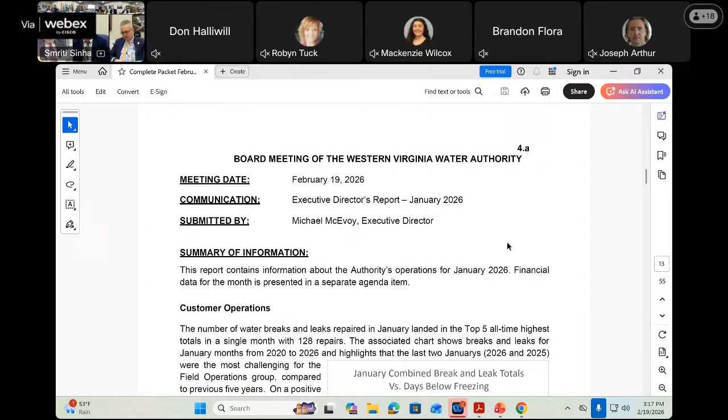Going through the report, Mr. Chairman, I want to highlight the wonderful work of our field operations and water quality crews. We had a lot of water main breaks at the end of January, the last two weeks, and those continued through February. We're reporting 128 breaks in January, most toward the end of the month, and we've already had 115 in February. That stretch of cold weather was problematic for the distribution system, but our crews did a wonderful job. We had pretty much everybody fixing water main breaks. We did have some sewer issues, but most of our CIP crews were fixing water main breaks.

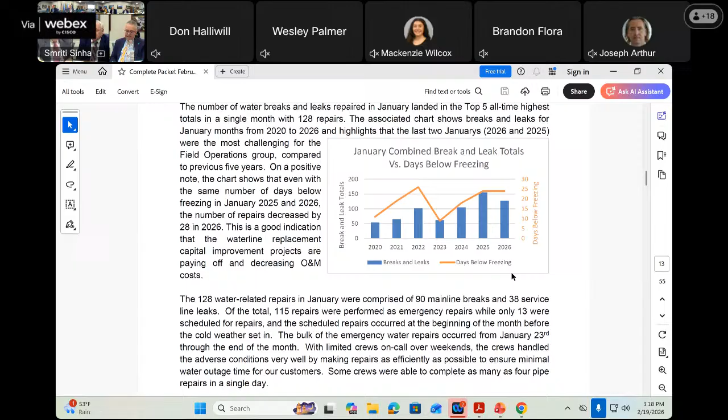I want to give a shout out to EC Pace. We actually had a main break on a bridge. They have a crew that's used to working on bridges and have the right equipment. They were able to get in and fix that overnight for us. We're actually looking at lining that main in the next few months to make sure that doesn't happen again. They were at the right time, right on the spot for us, really helpful there.

Our folks put in a lot of time through January and the first few weeks of February, and it wasn't just our field crews doing repairs. Our water quality folks were balancing tank levels across the organization. We had to run Spring Hollow more than we typically would, and some people had to stay late. It was a real team effort to deal with this.

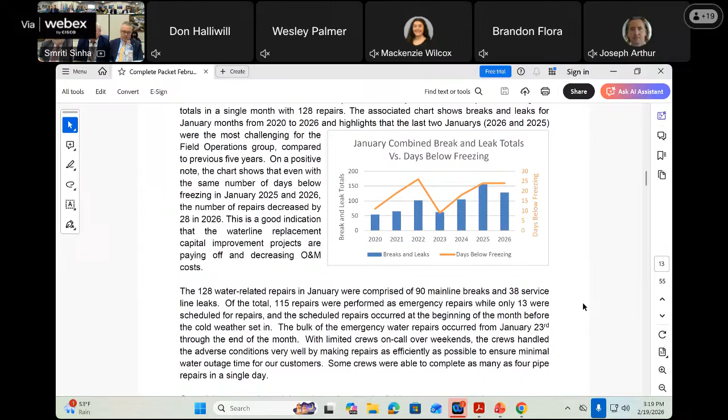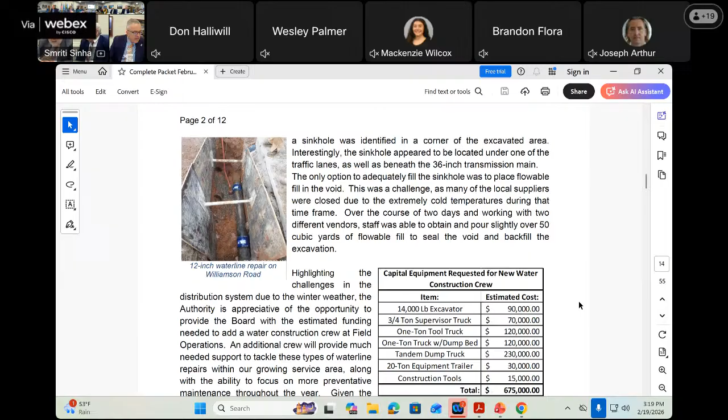On page 2, we talked last month about adding a new water crew, and we provided the cost associated with doing that. It's expensive to add a new crew, about $675,000 to outfit them, and the O&M expense for a new crew is about $300,000. But we do need to add another crew. This is part of a multi-year step we've been doing for field operations. We added a new sewer crew last year, and again we'd like to add a new water crew this year.

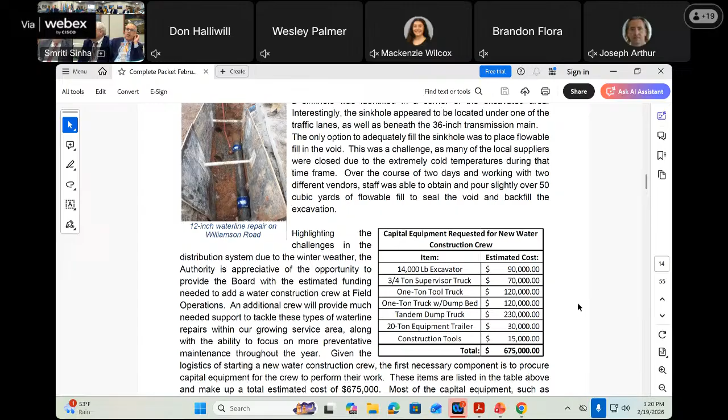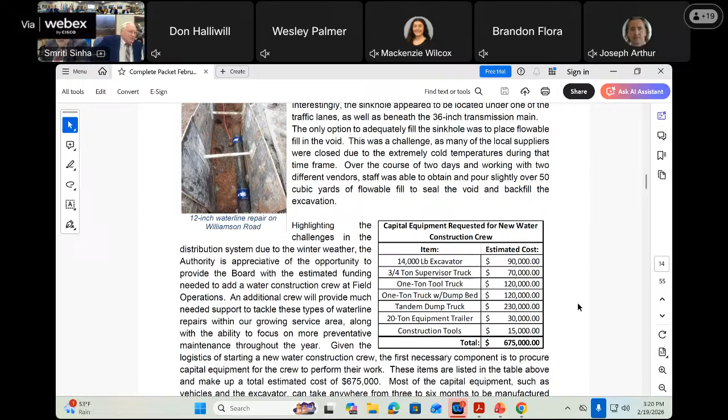Don had suggested that if we need it, we should go ahead and start now. We can start lining up equipment and recruiting new members, but this would be included in next year's budget since the time frame to stand it up means it would be part of next year's budget anyway. This will be an annualized cost, though the equipment is a one-time purchase that can last from 5 to 20 years. Dump trucks get a long time, a lot of use out of those, and excavators too.

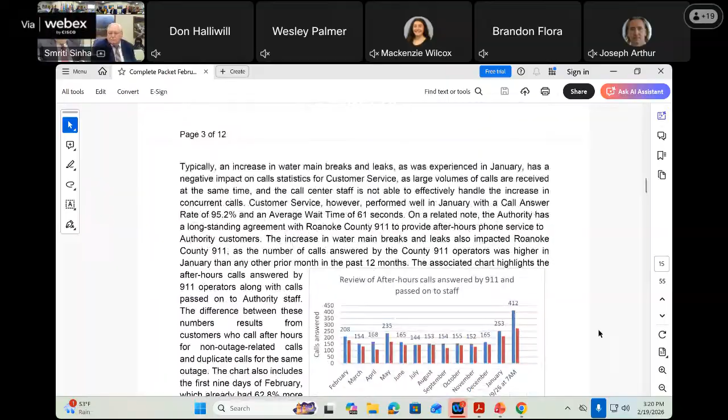On page 3, I want to point out our debt set-off program. The state of Virginia has a program where local governments can submit unpaid fees, including parking tickets, other liens, and for our case, unpaid water bills. You submit that debt to the state, and this year we turned in a little less than $500,000 of unpaid debt. The state will try to match that against tax returns for citizens, deduct it from their returns, and send us the money. It's a good source of recovering bad debt, and it works well for us.

Leon, I don't know if you want to add anything. We have seen an increase in collections through the debt set-off program, probably since October, so we're hopeful we'll collect quite a bit of money in this year's tax cycle. We only intercept the state return, not the federal. Lottery winnings also fall into that, so somebody will have a bit of their winnings taken to pay utility bills.

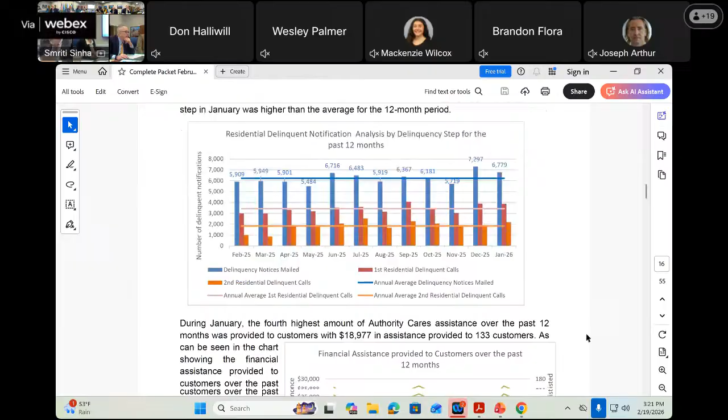On page 5, you guys probably noticed it started raining the last couple of days, so that's good. We got a nice rain event last weekend, a little less than an inch, but that was on top of our melting snows, so we've started seeing the reservoir fill.

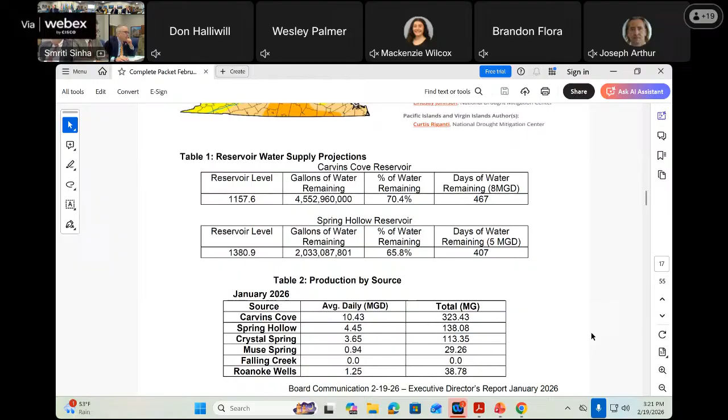As of today, we're 11.3 feet down, compared to last Wednesday. I think we were like 12.6 feet. So we've added a foot and a third or so to the reservoir.

We're getting rain today. Scott tells me we're getting good flows in the creeks and the Roanoke River. So we're going to continue to add water from this event, and it's supposed to rain again through tomorrow and then possibly Sunday again. So we're getting to that time of year where the reservoir starts to fill, both reservoirs start to fill, due to the spring rain.

Obviously we've had a lot of people looking at this number this year, especially in context of the data center project. And I've tried to let people know that it takes most of the spring to fill it up. It's not a sprint. One rain event does not top off the lake. But we're moving in the right direction there, so very happy about that.

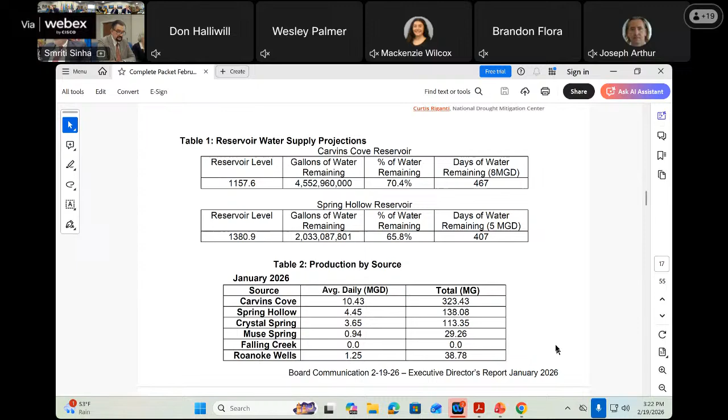Let's see, on page 6, we had an equipment failure at Spring Hollow.

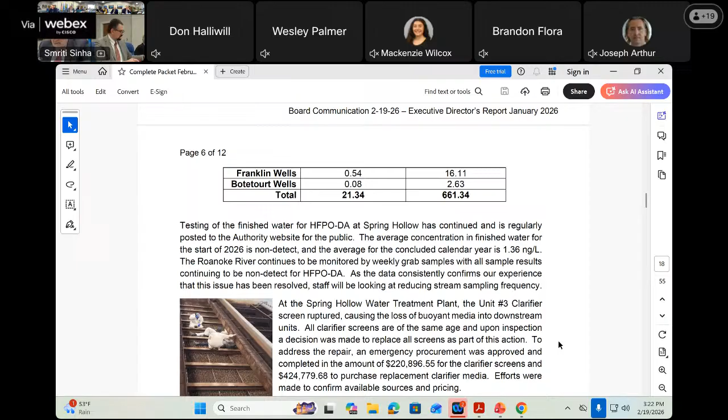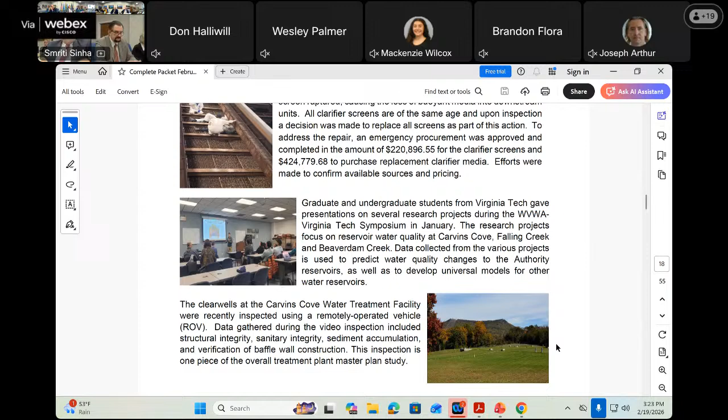The main filtration units there, we have 3 of them. They're upflow clarifiers, and there are screens and grids that hold the media in place. For most filters, you're flowing water down through them. These are ones where you flow water up through them. So there's a grid system in place that keeps the media in place. We had one of those fail.

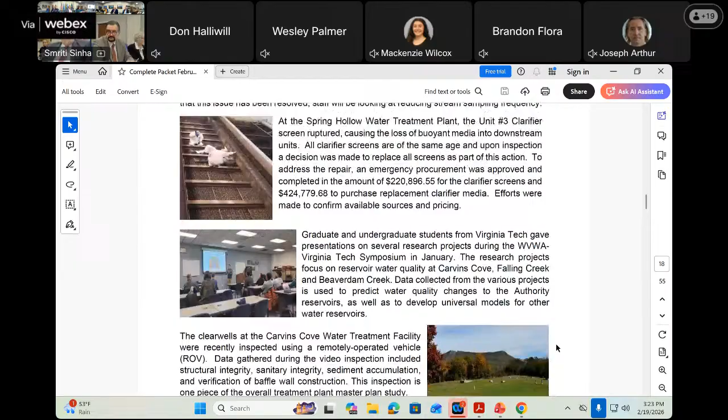We're kind of working with Virginia Tech to figure out maybe what happened here. Those were actually replaced in 2015, but when you look at the backside of them, they've had excessive corrosion. So the previous ones had lasted a little bit more than 20 years. We got a little bit more than 10 years out of these. So we started seeing the same corrosion issues on the second unit.

So we went ahead and just ordered new replacements for all 3 of the screens, and those are being shipped. In addition, since we were going to have number 3 down, we decided to just go ahead and change the media out on that, since that hadn't been done in a number of years. So it's kind of an expensive emergency repair here, but it gives us an opportunity, while it's down, to get in there and do some maintenance and change out the media.

Scott, I don't know if you want to add anything. No, Mike pointed out it's an unusual failure, so we're going to work with Virginia Tech, just taking a look. It's aluminum, and the level of corrosion does not seem normal, so...

Aluminum instead of stainless. And in 2015, for the pricing from the vendor, you could buy almost 4 sets of aluminum screens for 1 set of stainless steel. We do somewhat wonder, since 2015 is when we saw some problems in the American metals market. During that period of time, we saw a number of items across metals that we ordered where they were substandard. So that's part of the question - was this a one-off because of the quality of metal from the period of time they were procured, or do we have a corrosion issue? So we'll work through that.

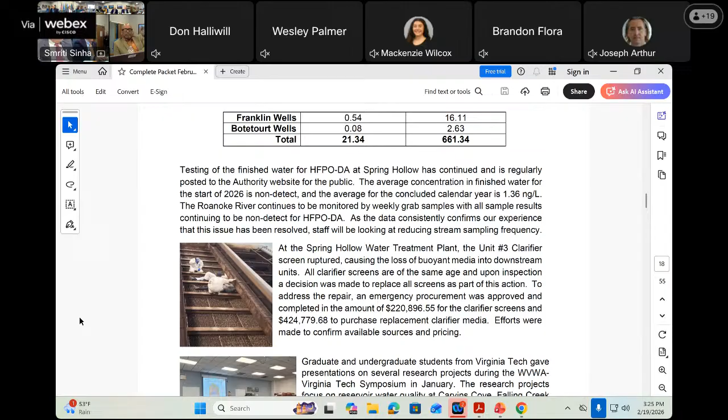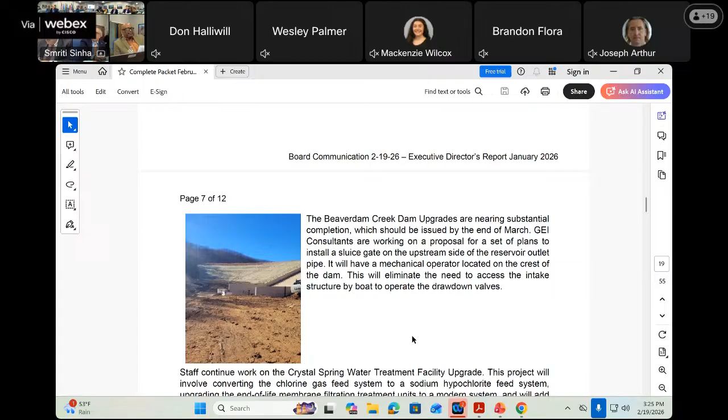At the top of page 7, I want to point out that the Beaverdam Creek Dam upgrades are finishing up. Our staff member monitoring the construction up there says it's a real mud pit right now. But when it dries out and we're finished, it might be a good field trip if you guys want to go up there and look at it. It's a pretty impressive structure that we've had to construct to meet the state's dam safety standards.

Something in the May or June timeframe, when we get all the road cleaned up and everything dries out, we could schedule something to go and take a look at it. But it's a pretty impressive structure.

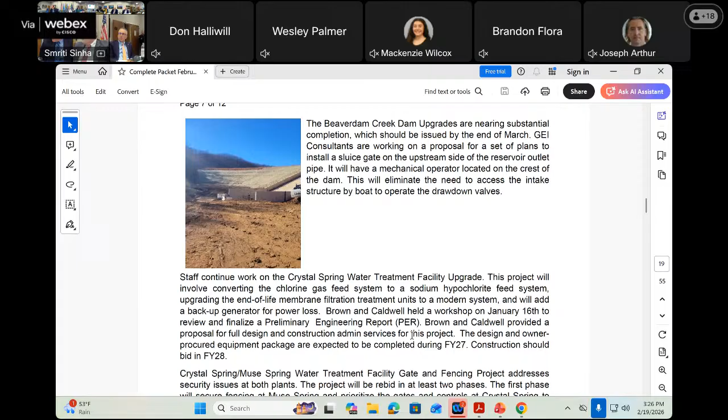I've never heard you cuss before. Yeah, the dam safety standards.

Our guys like to say, when the DCR guy shows up, he's the dam safety inspector.

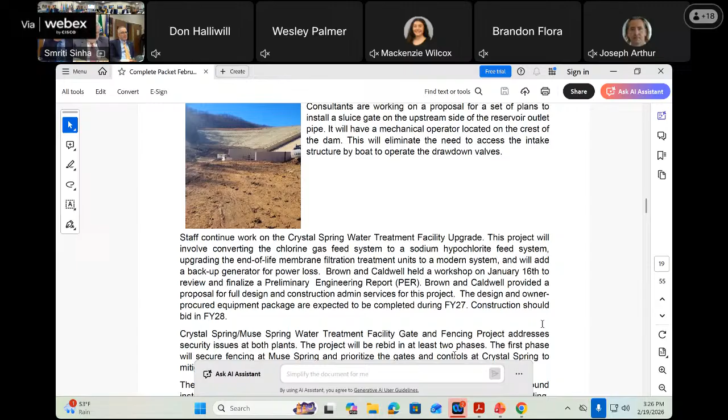On page 8, in the middle, I want to point out that we're starting to get close on our renovated meeting space room downstairs. We'll definitely have that room available by the June meeting. I'm hoping maybe the May meeting, but it'll definitely be ready by June. So we're making good progress downstairs.

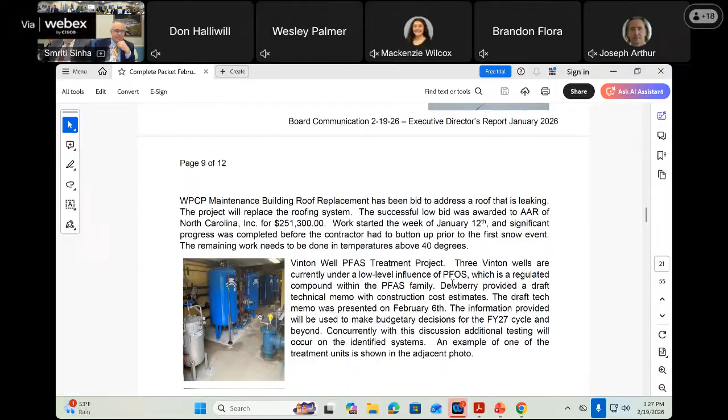On page 9, there's a picture of Carvins Cove, iced over. Brian's here today, and Brian tells me that one time the entire cove did freeze solid across the entire thing. This was about 95%, so we don't see that too often, but it gives you an idea how cold it was for how many days into January and the first part of February. So a lot of ice on top of the reservoir.

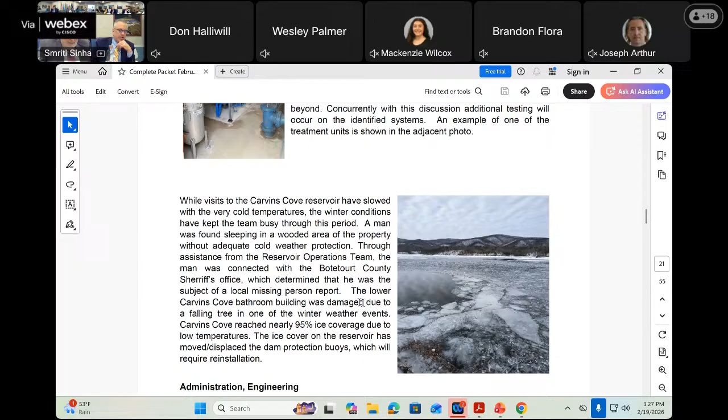Brian, you remember when it froze over solid? Do you remember that? Yeah, 2015. So it doesn't happen often, but it's been cold. Almost, I mean, it was. Remember, we don't allow swimming, so yeah.

Right underneath that, I want to highlight that we had our apprenticeship tour Saturday, February 7th, and we had 16 students and their parents come out for the tour. It was great, we're very excited. I think we have some good candidates for our apprenticeship program, so we'll continue to move through that process and hopefully get them on board by the summer.

Do you know the mix up between county and city? I do not, Sarah, do you remember? It was primarily county on the tour, but we had some city students that were interested but weren't able to make the tour. We haven't received all the applications yet.

Page 10, speaking of Sarah, her team was awarded the Blue Ridge Gold Summit Award for internal communications, for all our 20th anniversary employee milestones. They got recognized by the association that public relations professionals belong to. So congratulations, Sarah. And you can see here, there's a link to a YouTube channel.

The PBS documentary we did is out on our YouTube channel if you want to go back and watch it again, assuming PBS is still running it various times. They have one or two more times, but they said we can go ahead and put it out. I watched it this week, I thought it was excellent. It was so great from a historical perspective, and it's just a good reminder of how important this authority is. It's great, we've got good feedback too.

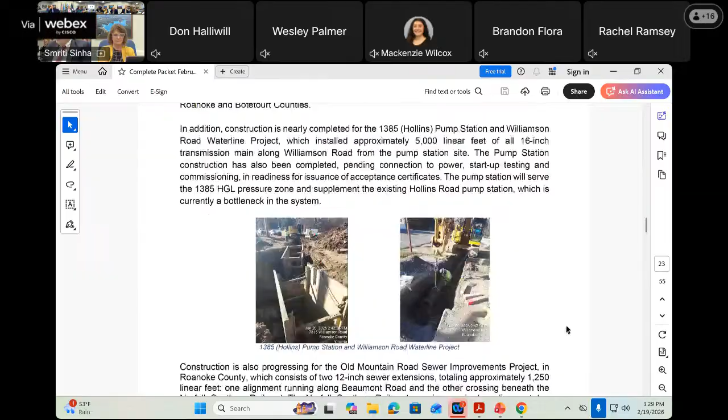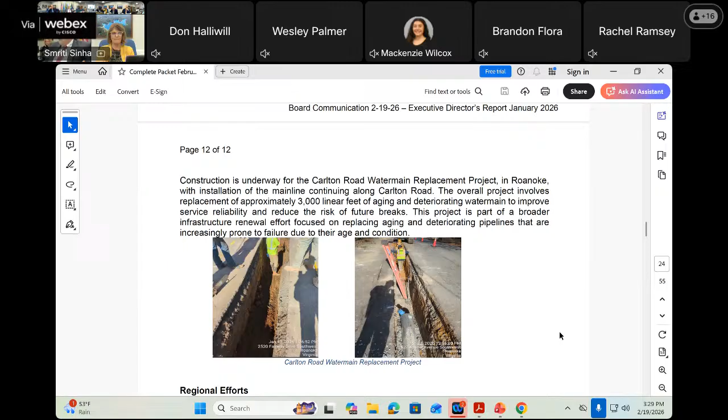Lastly, on page 12, I want to highlight that in January we had our annual meeting with all the fire public safety folks here in the building. Something we started doing a few years ago. Tesha and her team up in engineering services coordinate this. It's an opportunity for us to get together with all the fire departments, ask them what they're seeing out in the field, are there areas they have concerns about, and an opportunity for us to tell them about things we're thinking about. We talk about standards for the types of fire hydrants and where they see maybe low pressure concerns. It was fairly, most of the morning.

We had good participation from all the area localities, an opportunity to coordinate with our friends in the fire departments, because they're relying on us to have functioning hydrants for them before they fight fires. We want to know their concerns and if they're seeing problems so we can get those fixed. I think there was probably a break during COVID, but we did it for a few years before, and we've been doing it every year since. Mr. Chairman, that's all I have.

Any questions? Might keep jumping over, but can you comment on the Summit View, the economic development piece of the Summit View? Go ahead, remind us what that is again.

So we've been working in Franklin County to continue to expand the wastewater capacity at Summit View. If you're not familiar with Summit View, it's a business park in Franklin County that we've been working with Franklin County for almost 10 years now to help them develop.

We have a contract with the town of Rocky Mount to take wastewater from Summit View down 220 and discharge it to the town. Now, we haven't started doing that, but we keep building pieces of that and increasing capacity.

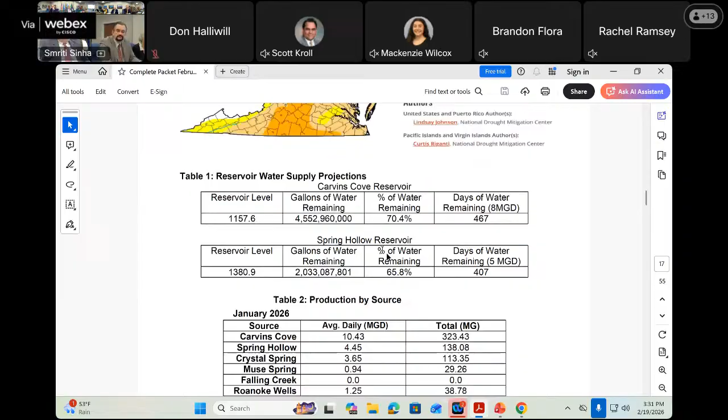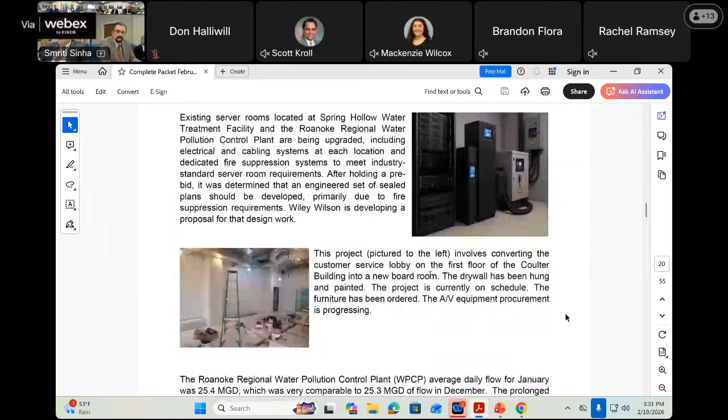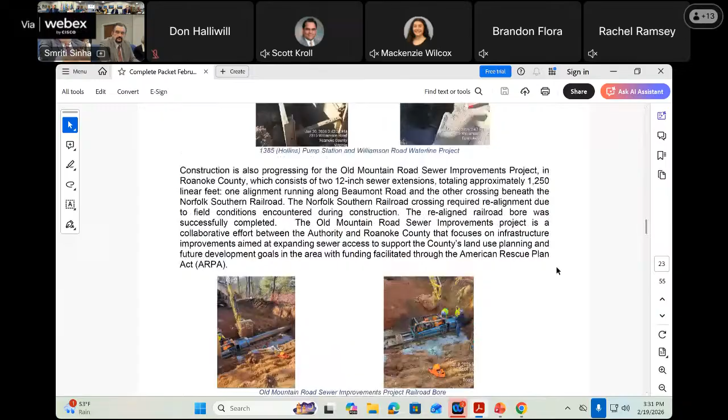Franklin County's been really good about getting grants, and they got a state economic development grant for $5 million last year to allow us to build out the system further. We actually did it a lot cheaper than we were anticipating, so there's about $2 million left over, and the state is giving us permission to spend that in the town of Rocky Mount, because we did a study and determined that if we do some improvements downstream of where we're discharging, we'll be able to increase the discharge from Summit View to the town system.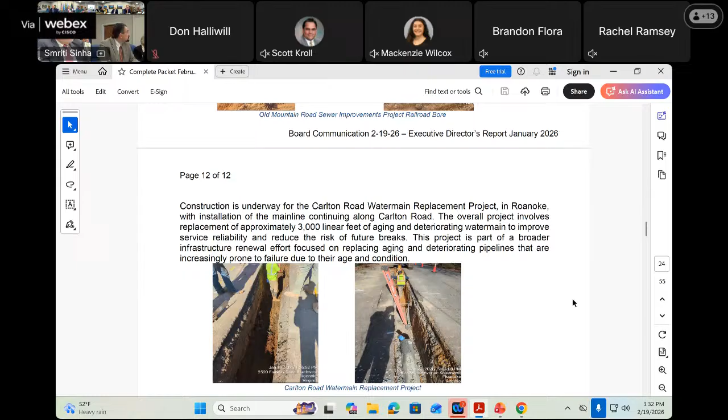Right now we're limited to about 400,000 a day. We could actually take it to 700,000. We still have some additional work to do, but when we first started, I think we were at 110,000 a day, and now we're up to 400,000, and should be able to go to 700,000. So we keep increasing wastewater capacity there.

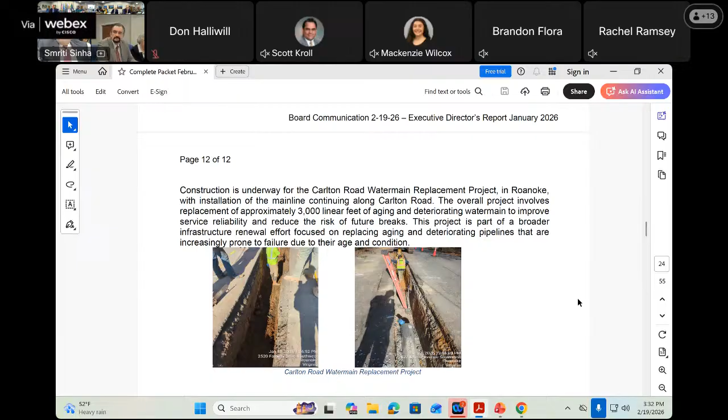It's going to be, in my opinion, one of the most successful development partnerships with Franklin County and us, to be able to continually develop that site.

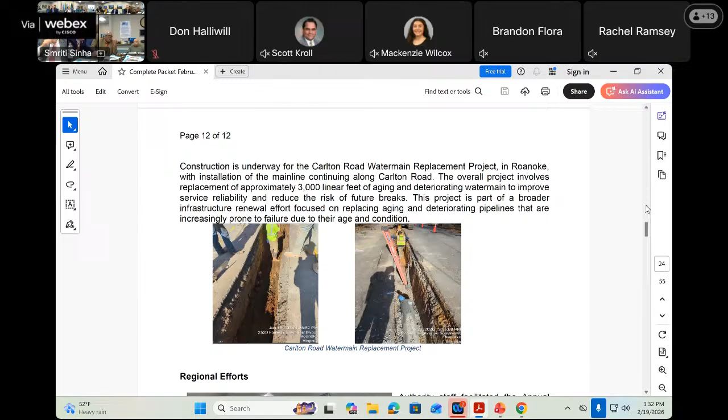But the big announcement was Traditional Medicinals, the tea operation. They've started construction there, and when that goes online, we'll have to start sending wastewater to Franklin County or to the town of Rocky Mount. I think there's going to need some expansion.

People are proposing some residential units at Westlake, and there was just another improvement there. Between Scott and his water quality guys and our engineering folks, we're getting ready to expand the Westlake plant. I can't believe I'm saying that, because for years we had hardly any flow to it, but that site allows us to expand, put in more drain fields, and we'll have to add some treatment capacity.

But Westlake is growing. There's another assisted living facility going in, and there are apartments, townhomes and things like that. For a long time we didn't see a lot of development around the lake after the 2008 economic crash, but it started to pick up quite a bit.

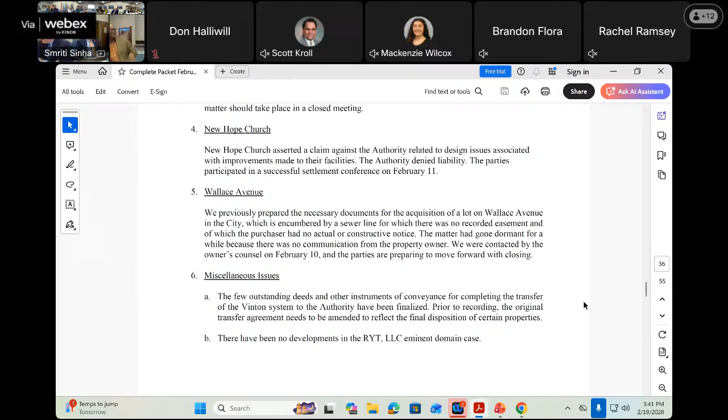Were you able to settle on the price and everything? Yeah, it's already resolved. Hopefully when some of the other items go away, I can get the things in the miscellaneous. Those are the items taking up most of my time, Mr. Chairman.

Thank you, Nick. Happy to answer any questions anybody may have. Any questions or comments for the Chairman?

Being that there are none, we will move on to reports from committee chairs.

The compensation committee met just prior to this meeting. One of the things we wanted to talk about, if you remember in the fall, was paid family leave, paid caregiver leave. This was an idea we had brought to you all in the fall.

We have an issue right now with our hybrid employees who have a great disability benefit if they need to go out on FMLA, but it only covers them. It doesn't cover if they have to be a caregiver for a spouse or another family member. So we were looking to do kind of a wraparound benefit there for them.

The General Assembly kind of beat us to it. There's two bills under consideration right now: one which would mandate paid FMLA leave for all businesses in Virginia, and another that would mandate paid sick leave.

Since those are pending, we decided to wait on implementing the benefit we were talking about until we can see what happens with the General Assembly, whether any of that becomes law this year, and make a decision after that.

Thank you, Mike. Mr. Chairman, members of the board, we're pleased to give you the annual metrics we keep track of. I think both of our teams keep track of a lot more metrics, but we think these are the most meaningful for the board. So I'll cover the metrics for water quality operations, and then turn it over to Ms. Stoltz to cover customer operations.

All right, next one, please. Good one. So we'll start with the water update.

We've consistently tracked these metrics over time, so you'll see the updated numbers in 2025. Our treatment costs per million gallons produced stands at $1,141 -- it's almost doubled.

Yes, ma'am. The next slide will help with some of that, but we have seen dramatic increases that the board had to deal with on electricity -- that's one of the most prominent. And then chemicals after COVID -- it wasn't an immediate reaction, but we really saw a lot of different dynamics in the chemical market. As you see the data, because we've broken some of that out, it's beginning to soften a touch, so we're hopeful.

I would say we also, like everybody, were experiencing kind of the great resignation of employees, and so we implemented a couple of different pay increases. I want to say the combined number was close to 25% pay over several years, and those are kind of reflected in that number too.

If you go to the next slide -- here's part of the story on our expenses. The dotted line represents costs that include the PFAS treatment. In 2024, that was $1.8 million in GAC costs. In 2025, that's $2.4 million.

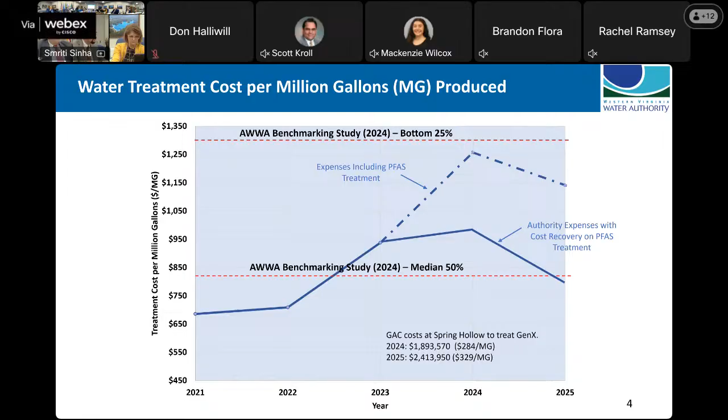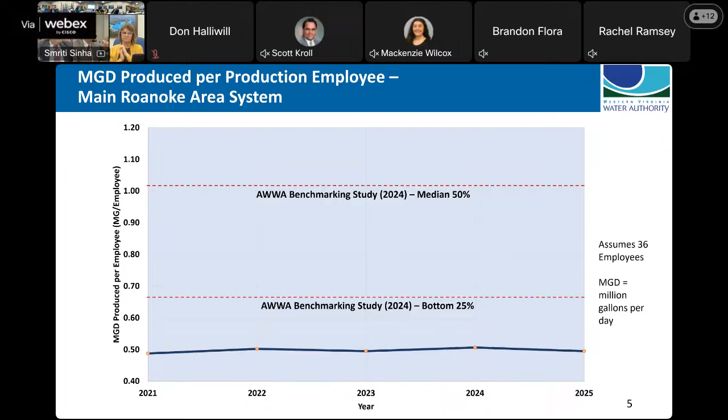Next slide, this one will go with another slide we've added this year. We have two large reservoir plants, very mature systems. The big takeaway from this slide is we have the capacity, because as we've discussed, you have the same cost inputs whether that facility is producing 8 million gallons or 16 million gallons from a personnel standpoint. So we'd actually be much more efficient producing higher volumes of flow from our facilities.

Next slide, this is our water treatment chemicals. A number of these do not have AWWA metrics, which is a little disappointing because it would be helpful to see this from a national perspective. There are some regional differences - some regions take chemical supply from Canada and are impacted more by tariffs, seeing dramatic price increases in the last couple years. We're fortunate our supplies aren't impacted by tariffs at this point, but we are seeing a softening on chemical pricing. It was really nice to get chemical bids this year and see prices lower - not that upward trend.

Wait, you said it went down? Yes, a number of our chemical prices did decrease this year. Nice, and so that helps take some of the pressure off.

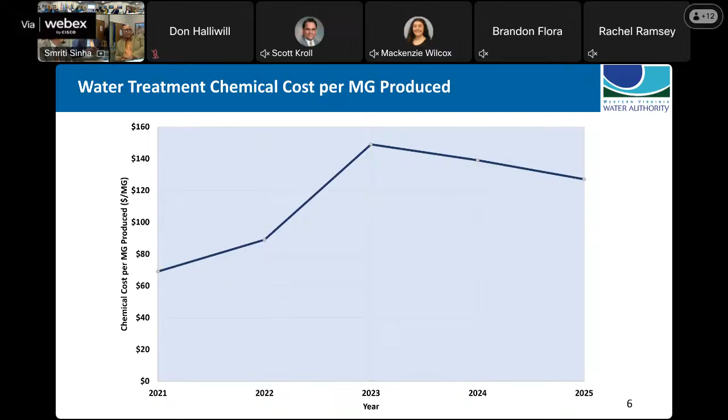Great, next slide. Not true with electric. The electric - going back to the chart - was $205 per million gallons in 2024. It's $206 this year.

We do have a presence on the VML VACo committee that negotiates rates. I know the City of Roanoke has representatives on that too. It's good and bad news - the rates are going to go up in the next contract with AEP, but thankfully there's been a very good group of attorneys and accountants working on that, so at least for the jurisdictions we'll have some stability. It should be a little more predictable. There are some unknowns related to the PJM auction and some expiring provisions this year that could give everyone rate shock, and we'll just continue to track that.

Didn't we do a project with electricity at the wastewater plant? Yes, and at the wastewater plant, that's our single biggest load.

We should go back and take a look at what the impacts would have been if we had not combined those distributed meters - it would be good to know. It masked the savings we think we would have achieved. That project was expected to achieve about $200,000 a year in savings, but then obviously the rates went up like a hockey stick, so it softened the savings.

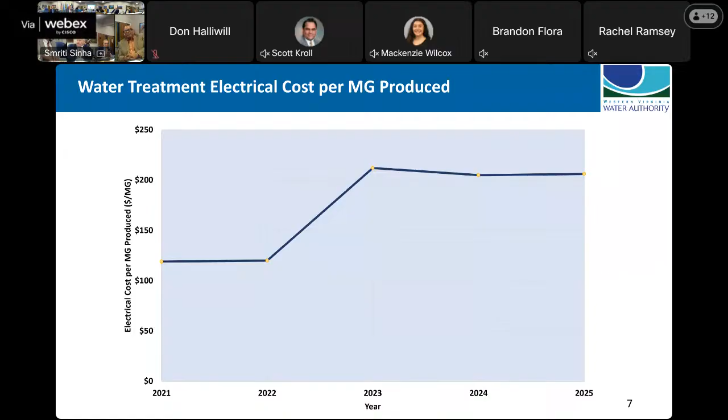This one I thought was really pertinent, and we added it to the presentation this year. This is a comparison of our available source capacity versus our allocated capacity. There's an AWWA benchmark, and we are in that top quartile range. That shows, in my mind, prudent planning, because when you're reaching that 75th percentile, or the bottom 25% at the top, those are planning horizons for future capacity. I thought this would be helpful for the board to see the comparison of where we're at and how that trends nationally for available water supply.

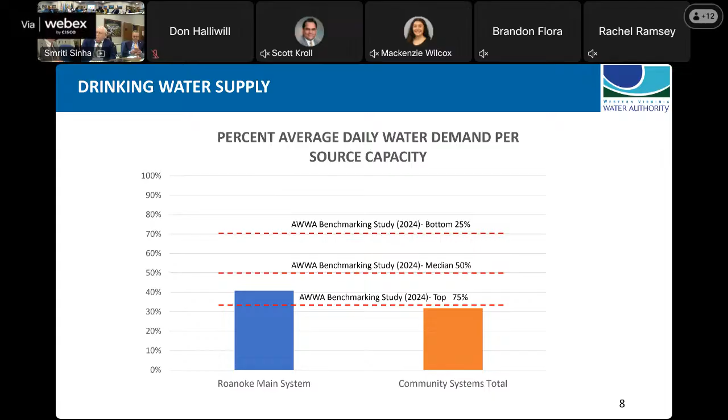Now we'll move over to the wastewater side. Very pleased to know the headliner is a decrease in cost from $947 to $897. A lot of these costs are driven by chemical and electric, and we've seen some improvements there. Tammy Longfield did calculate the city of Salem's bulk rate recently, and it resulted in about a 5% decrease in rates to Salem, which they were pretty pleased to see. That'll go into effect July 1 of this year, so they'll see a rate reduction.

The treatment per million gallons per employee—I guess that's because of reduced I&I, a lot of it. One thing we have seen is the flows at the plant are down. Some of that is probably due to the drought issues, but we haven't seen much I&I there; a lot of it's due to our work in the collection system to dry things up.

That number will still hunt around. We're obviously going to get, like Mike said, dramatic improvements, but then we get a really wet year and the number goes up. So it's going to hunt in a range, and we've kind of seen that with the city of Salem rate—we use a 3-year flow average. But it's really surprising every time how that rate can hunt up and down, and it's really attributed to dealing with a number in the billions—that moves the needle.

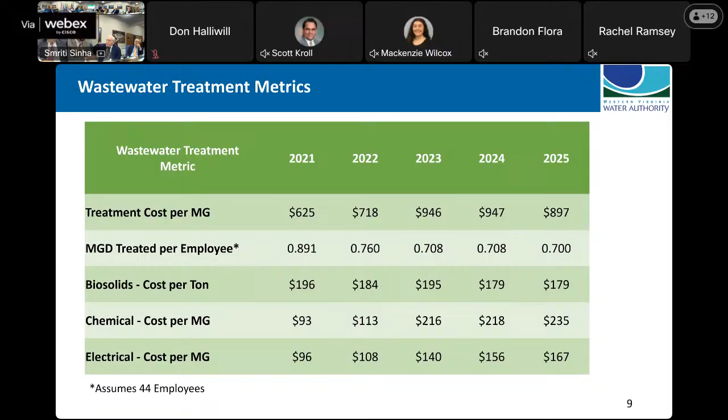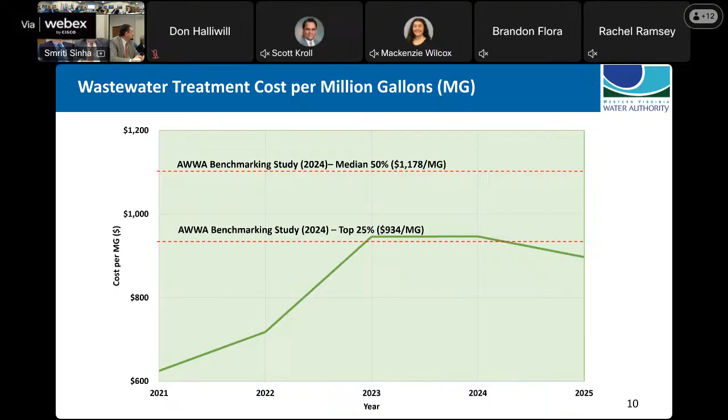On our wastewater treatment cost per million gallons, we are in the top quartile of the AWWA. Really pleased that this year we're actually moving even further up. I think that speaks to the efficiency of the wastewater operations.

To Randall's point, this is our MGD wastewater per treatment employee. Again, it shows we're in a really favorable range for the size of the facility. The one thing you have to take into account is the complexity of treatment—we actually have one of the most complex, heavily regulated plants in the Commonwealth. The only plant similar to us is UOSA, and UOSA basically discharges into a drinking water reservoir.

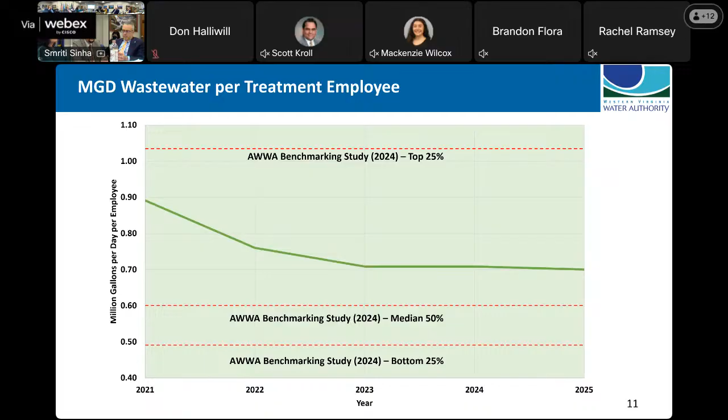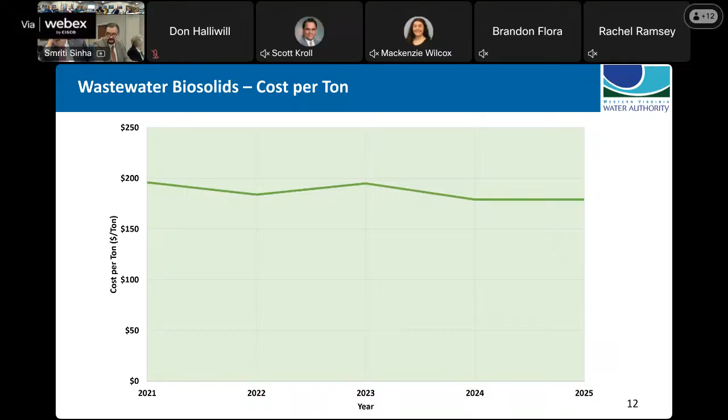Biosolids costs—Mike mentioned this earlier. We're really pleased that this remains stable, but this is an area where we have concerns that could dramatically impact the overall cost of wastewater treatment. The cost right now is running about $180 a ton. If you add the landfill fee and the cost to dewater, we're well over $300 a ton. Hopefully that bill is not going to affect us, but it has operational consequences for us if we have to landfill.

On our chemical cost per million gallons treated, this has continued to escalate up slightly. Part of that is one of our heavy-use chemicals, ferric chloride—we use ferric to try to control copper, since copper is a concern and we do not want metal limits in our permit. We found through study that some of our copper loading at the wastewater plant was actually attributed to the ferric chloride. We worked with the vendor, who has two manufacturing sites, and we've switched to a more favorable site that lowers our copper, though we're still working on that issue.

This number is also influenced by the fact we've had multiple dry years. If you throw wet years into the mix, since it's measured per million gallons, the number looks different.

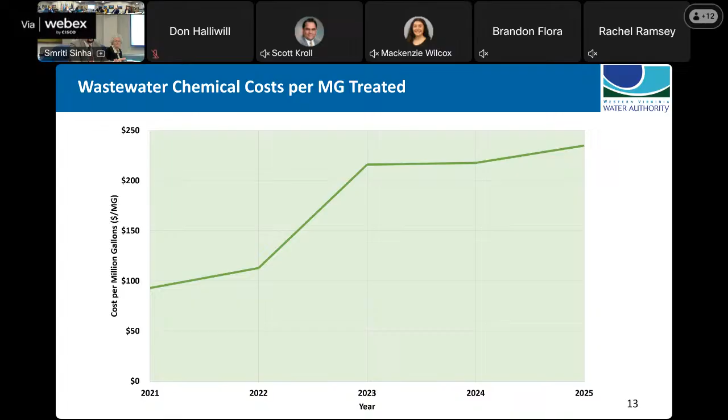Electrical cost continues to escalate across all accounts, and we continue to expect that to increase. There are some actions - the administration's requested an emergency PJM auction to require certain parties to purchase additional generation capacity. We'll wait to see if that ever transpires.

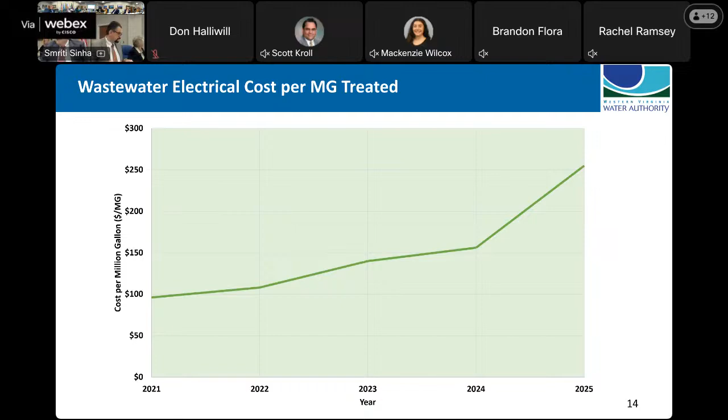At least the outlook now is we understand over the next 3 years we'll see some level of ongoing increase. So Harvey, to your question before, it kind of looks like we've used our savings up through '24, and then after that, it's kind of gone up.

Next, there's not an AWWA statistic, but in common with the water presentation, this is the percent capacity used of our VPDES permit. You can see we're about 57-58% of our permitted capacity. Our permits contain a capacity reopener at 95% - when you trigger that for 3 months, you have to submit planning for expansion of capacity. The good news is there's plenty of capacity for economic development across the region served by the regional wastewater.

The community systems numbers just give an idea on the community systems - those are the peripheral systems: Franklin County, Botetourt, our surrounding areas. Even some of those systems have some capacity to support additional capacity.

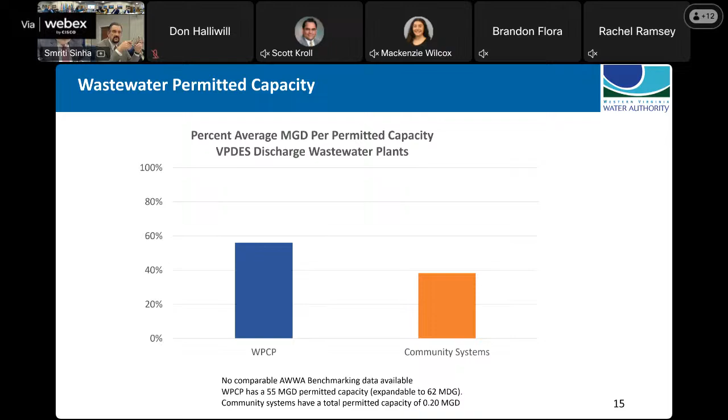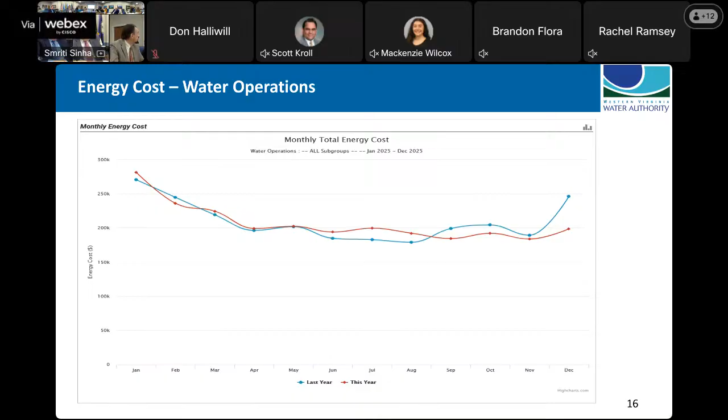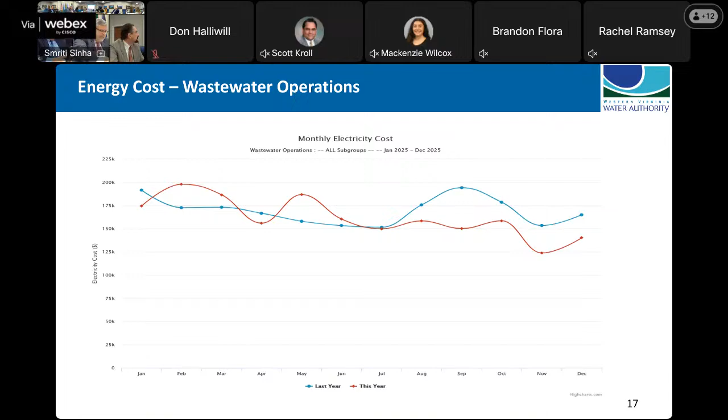This is on the water operations group, and next slide, this is wastewater operations. While you see the costs went up, actually our costs are lower than last year. Our utilization is lower - part of that's a function of the dry year. As we see dry weather, we're able to cut power utilization.

For our peripheral activities, as Mike mentioned, we have our biosolids program - inspectors and environmental programs that do our compliance work. Last year we land applied 5,360 metric tons of biosolids. Our industrial pretreatment covers about 66 permitted industries - we completed inspections at all of them with random sampling. We completed 1,672 home inspections and found 54 defects that were corrected.

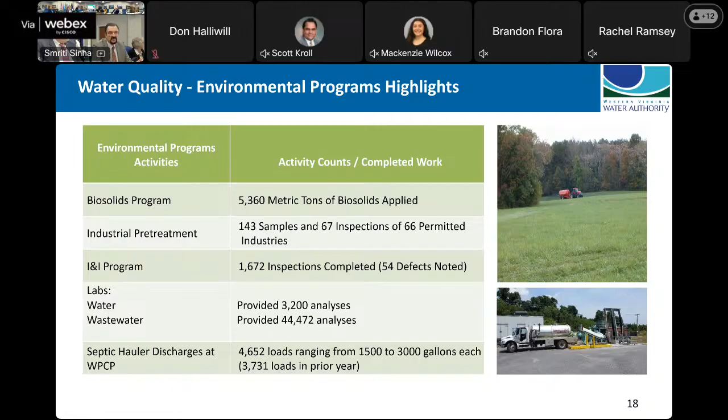Then the septic haulers - the board helped take action last year to bring this down, it shows you the difference. We had 4,652 loads in 2025, compared to 3,731 the prior year. That's really the issue we highlighted for the board - there were changes in the market driving it. The last couple of months, with the board support to change rates, we're seeing some of those come down, and I hope that trend will continue.

Our maintenance department - we're blessed with a really phenomenal maintenance team that does a lot of rebuild work, which really helps keep our costs down. They completed 3,727 work orders last year. We always want to be proactive and preventative, so we trended at 69.8% of our work being preventative proactive work. About 26.9% were breakdowns, and 3.3% were new projects - things the maintenance team takes on if they have capacity.

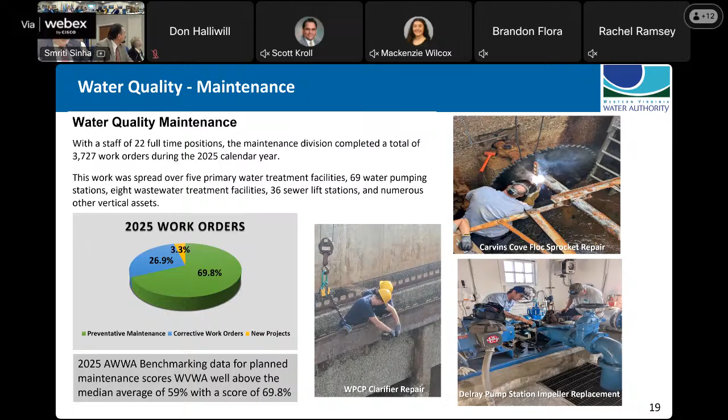Our capital team - I'm really proud of them, they keep driving forward a lot of important projects. Really proud of the work on the Ferrum water treatment plant - the facility looks great. One of our philosophies is we should be able to go anywhere and show a picture of where your water comes from and be proud of that, so we want to keep facilities in good shape. They managed projects in excess of $15 million last year, and we're happy to bring the Beaver Dam project to conclusion - those take a lot of manpower and tracking on the large projects, plus all the peripheral projects on task.

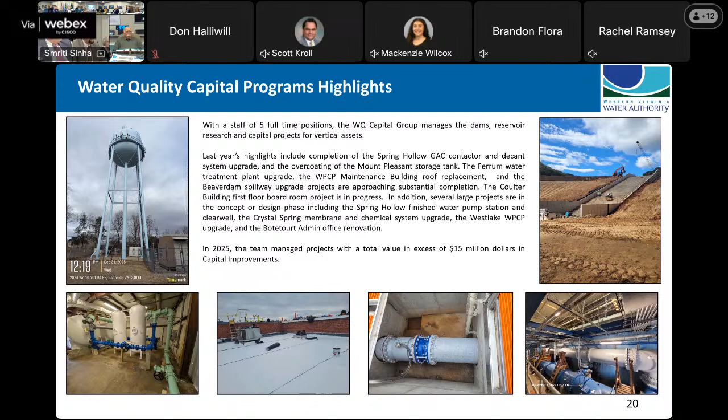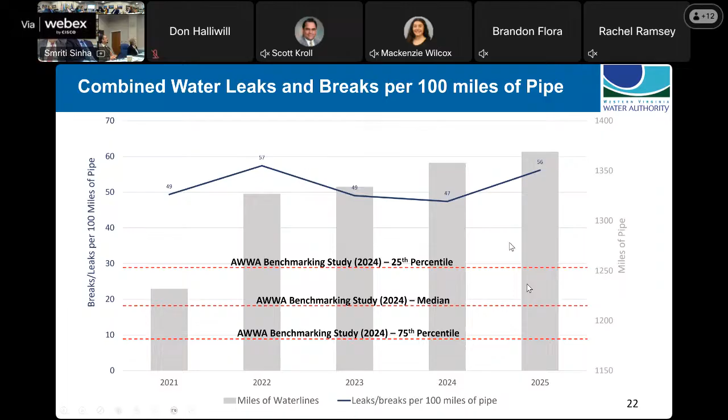Our hydrant out of service rate in 2025 was 1%. We only had 63 hydrants out of service for last year, and it is right in line with the median of the AWWA benchmark study for 2024. One of our problems is just people hitting them with their cars, a good portion of those are just traffic accidents where people run into them.

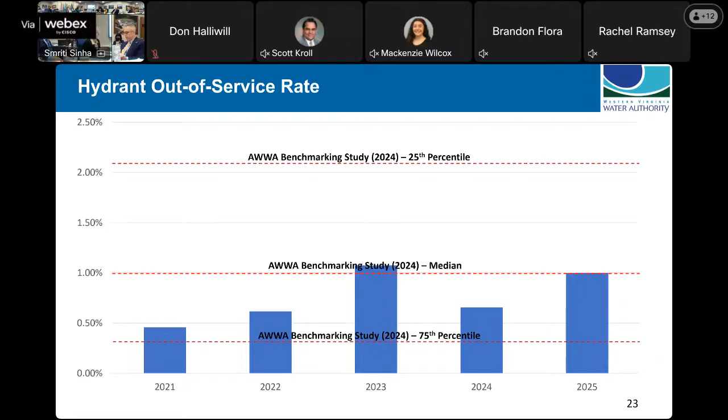What period of time do you consider to be out of service? We try to not have more than 10 hydrants out of service in a month, so you can imagine it gets fixed quickly. On the traffic ones, to the extent that we can identify a party, we actually do go after some insurance recovery on that.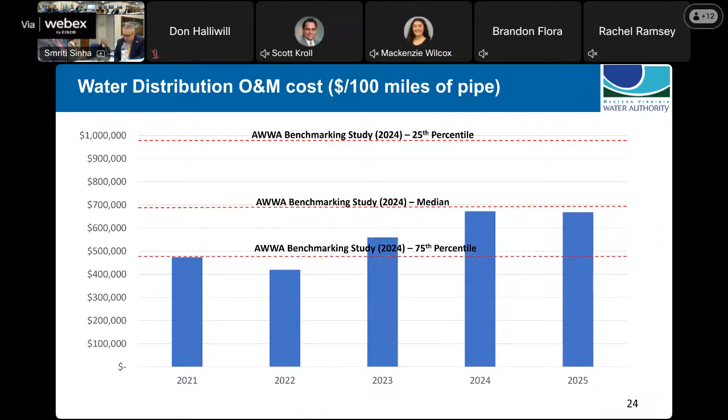When we look at our water distribution O&M cost per 100 miles of pipe, we did see a slight decrease in 2025 from 2024, and we were right about the median of the AWWA benchmark study. The increase we saw in 2023 was mostly related to repair part increases, and in 2024 it was for paving. In 2025, we continued to cut back on that backlog we had in paving, and we contracted with 3 paving contractors to help with that. We're happy to say earlier this month we had less than 600 open paving cuts in total, and less than 250 of those were in the city. Also want to point out that we are comparing our 2025 operating costs to 2023 operating costs that were reported in the AWWA in 2024, so we're not really looking at the same time periods.

The sewer integrity measure looks at failures or blockages per 100 miles of pipe in our sewer system. Our number in 2025 was 5.8. If you look at the chart to the left, we are comparing our historical numbers to the miles of pipe we maintained in each of those years, and you can see how the miles of pipe we maintained have increased over time. The chart to the right looks at our statistics compared to the AWWA benchmark.

Over the last 3 years, we saw a decrease year over year, and in 2025 we were below the 25th percentile of the AWWA. What happened in 2022? It seems like just a spike right there. We took over Vinton. Okay, the short of it, enough said.

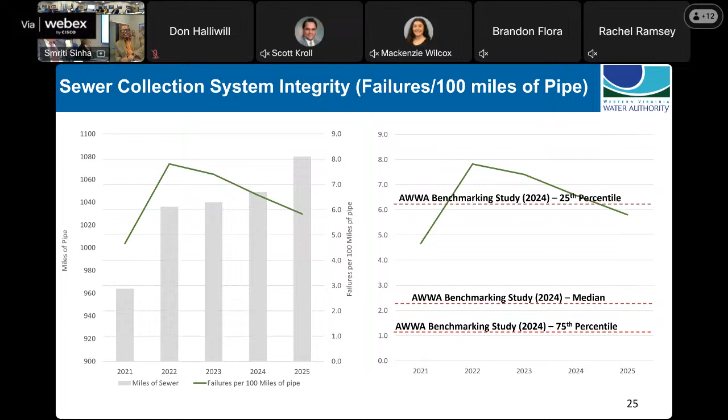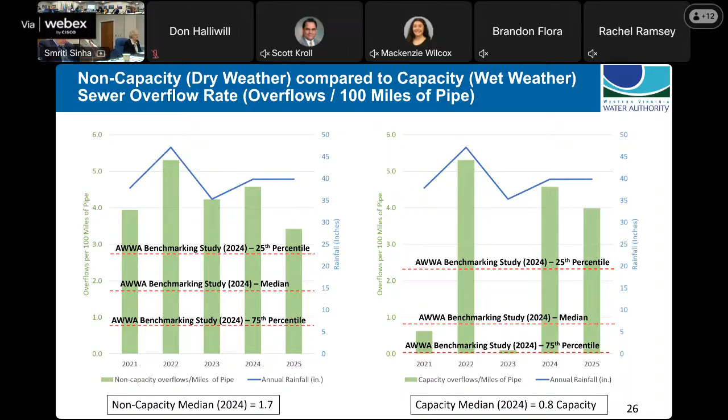This looks at non-capacity or dry weather sewer overflows compared to our wet weather overflows, at the number of overflows per 100 miles of pipe. We're happy to report that between 2024 and 2025, we saw a decrease in each one of these performance measures. The number we had for dry weather overflow in 2025 was 3.4 per 100 miles of pipe, just 0.6 above the 25th percentile of the AWWA benchmark study. Our wet weather overflows decreased by 0.6, and it was 1.7 above the 25th percentile of the AWWA benchmark study. We did have 43 wet weather overflows last year, and 38 of them occurred in one month, in February, when we had 3 inches of rainfall over a 2-day period after we already had a major snow melt event, so the soil was saturated.

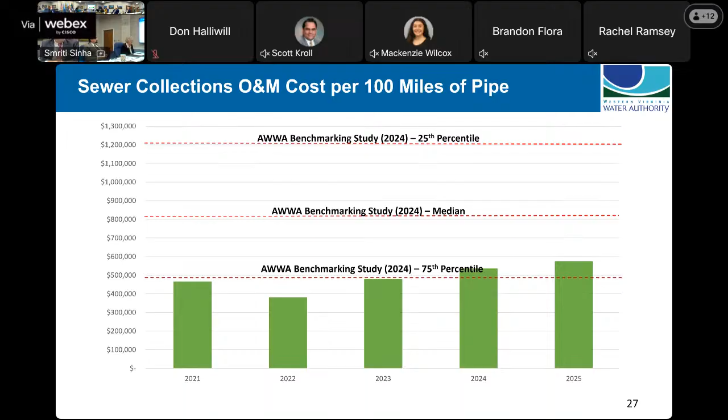Our sewer collection O&M costs per 100 miles of pipe increased slightly in 2025 over 2024, but we are still around the 75th percentile of the AWWA benchmark study, which is really good. Some of the reasons for the increase in 2025 were our chemical root treatment, which increased by 70% last year, and we had to do that to maintain the warranty on those treated pipes. We also saw some increases in sewer construction costs for repair parts, and traffic control was highlighted in there.

Next, we're going to look at our customer service, billing and collections performance measures. The first is the percentage of accounts on electronic billing, and we had a tremendous increase of 7% in 2025. For us to print and mail a utility bill in 2025 cost 82.5 cents, and that is really cost effective because we do our printing in-house. But the over 34,100 customers that received their bills electronically resulted in almost $340,000 in cost savings, so we want to continue to encourage our customers to sign up for e-billing.

Our payment method comparison highlights that 52% of the payments we received in 2025 came through online payment methods, either on our website or through online banking. That was a 0.5% increase over 2024.

We saw a 2% increase in customers making payments via electronic bank drafting, and another 31% of our total payments came in through the electronic bank draft method. The total between these two payment methods is over 83%, and that is the most cost-effective way we can receive payments. To process a payment manually last year cost us $1.17, and that came down because our lobby operations closed and we have less staff doing that.

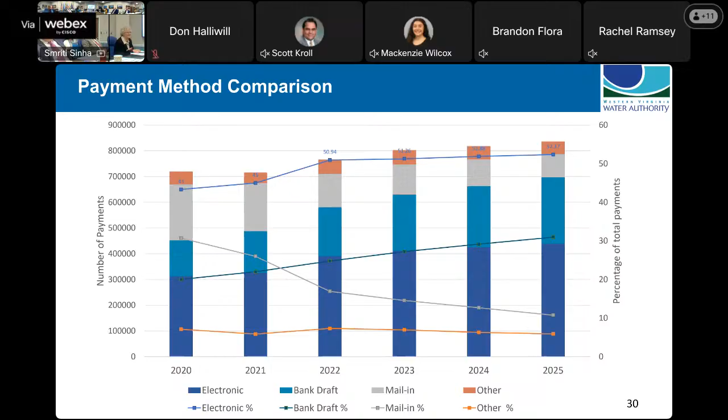But the traffic we see at our payment kiosk is incredible. I don't know why you would drive all the way downtown to pay a utility bill, but people do that.

The average calls answered per customer service rep in 2025 was slightly higher than in 2024, and 18% above the 75th percentile of the AWWA benchmark, so they outperform other utilities by far. Our average talk time was 4 minutes and 48 seconds, which is right in line with the 25th percentile of the AWWA benchmark study, and almost twice as long as those utilities in the 75th percentile.

Our first call resolution rate is 99.3%, which is 4.5% better than the 75th percentile of the AWWA benchmark study. The reason is our customer service reps are very well trained, and we provide them with numerous tools to help them while on calls. One is the ability to chat in a group with peers and supervisors while on a call, so if they don't know the answer they can get it from someone else. That naturally increases our talk time, but we end up with a very high call resolution rate, which provides better customer service in the end.

Our abandoned call ratio in 2025 was 5.47%, exactly what we had in 2023, and 2.5% less than 2024. It is below the median of the AWWA benchmark, which is 6.5%. We of course want to do better in this performance measure and answer as many calls as we can from our customers.

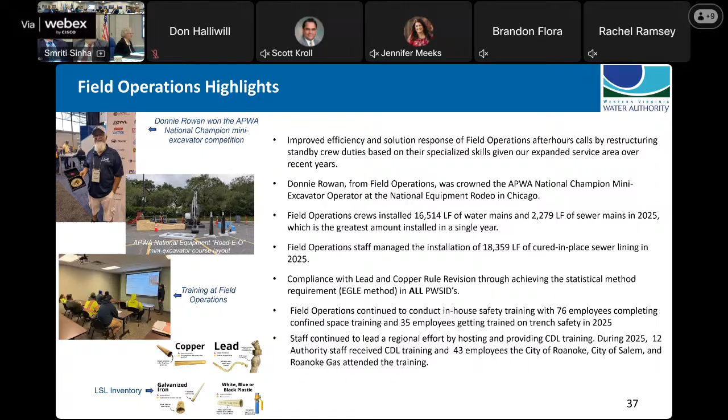Mr. Chairman, next month it's all revenues, rates, and expenses, and Tammy will be taking you through the budget update. We're going to try to dispense with the usual reports and everything and have maximum amount of time to cover that because we have a lot of material to cover.

We'll get our microphone. Yes. And happy to answer any questions about the material presented today. Great information. Absolutely great.

All right, no further comments? Okay, great reports. I agree, Harvey. It's good. All right, comments from board members? Any comments? I just have one question.

You had that Raftelis report that was attached. Are we going to discuss that at all, or is that just for a reading? That's for your reading ahead of next month's. So it'll be on the agenda? Yeah. For next month? Yeah, wanted to get that out ahead of time, for the rate discussion. We're still trying to finalize that, but we wanted to get that out to you all to take a look at ahead of the rate discussion. Okay, thank you.